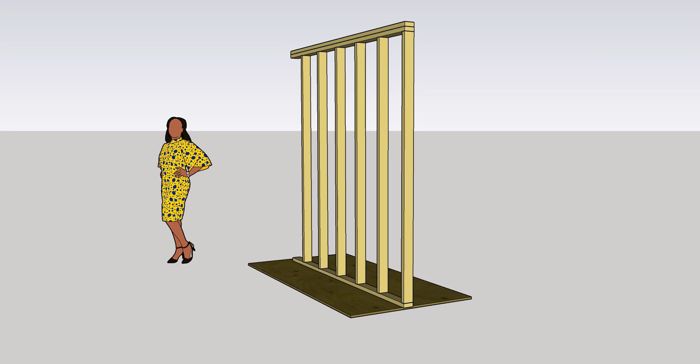So if you remember, the bedroom for the Jones had these dimensions on the floor plan. And in the lecture, I said you need to take off the wall thicknesses because these were going to be center lines. Now the true wall thickness is 4.5 inches. You have a 3.5 inch stud wall, half inch on one side of drywall, half inch on the other side of drywall, and it's 4.5 inches.

For simplification purposes, I said just take off 2 inches. That's going to be good enough. Remember, these are still estimates, and there's always a little bit of slop in the number. You want to be as accurate as possible, but you don't have to go to like the 10th decimal place.

So if we add this distance of the bedroom from this point to this point, it's 13.6 plus 2'6" minus the 2 inches of this wall and the 2 inches of this wall. And that's what we've got here. We've got 13.6 plus 2.6 is 16 foot, minus 2 inches is 15.8, and 15.8 in decimal is 15.67 in feet. Same thing for the other wall.

This one did not go to the outside. Sometimes dimensions will go to the outside, and I said in class we'll take off about 6 inches for that. And again, it's a 2x6 wall. It's got exterior, it's got interior, but in this case we don't have to worry about it because the dimension string stops on the inside, so we don't have to go through that wall. We're good. Remember, for this paint and all these finishes so far, we've only been doing the interior surface.

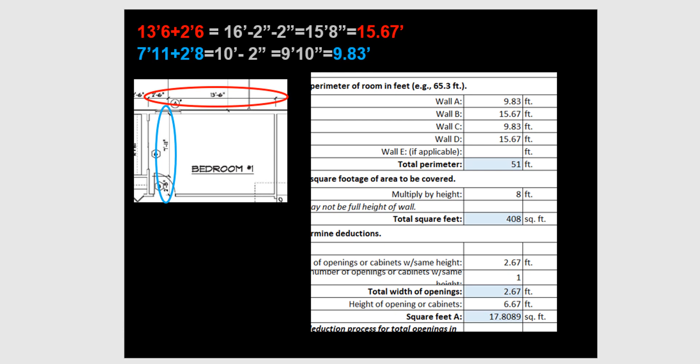So this is 7'11" plus 2'8" equals 10 foot minus the 2 inches, because there is this wall to consider only. And then that comes out to 9.10, which means 9.83 feet. That's the decimal formula. So now we can put that into the worksheet we have.

And the worksheet we have works fine if the ceilings are flat. Bedroom number 1 would be a standard height ceiling of 8 foot. So we have the 4 walls, and we've got the dimension here. I personally think instead of perimeter, we should say lineal feet, and consider it that way too, because it's going to be important later on. Basically, perimeter and linear feet is what we're doing right now anyways. We're trying to get how much wall surface and how high area to go through it.

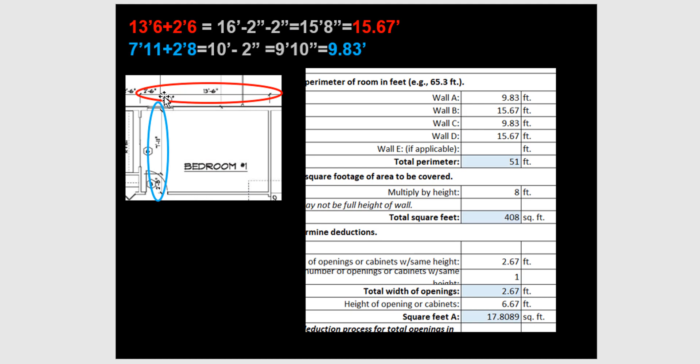So again, what they do in the calculation sheets is they take the width of the opening or the cabinet, multiply it by the number of openings of the cabinet, and then multiply that by the height. Frankly, this could have gone in the other direction — they could have had width of openings, height of openings, and then number of openings. Same notion, just the way that it was written, and it's fine. Same thing for the door: 2.67 is a 2'8" door according to the schedule, so it's 2.67.

One of them, that's the total width, is 2.67 times the height, and that gives me the square feet. The other one is a 6 foot wide bypass door in the closet. There's only one of them, so of course you multiply that. This formula should be the multiplication of the width times the number of them.

Same thing here with them. Actually, once you get these formulas done, you can copy them here and copy them here because the relationship of these numbers to the formula is the same. The height of this is 6.67, that's 6'8", and again that's the calculations. Same thing here, 6'1", 6'8".

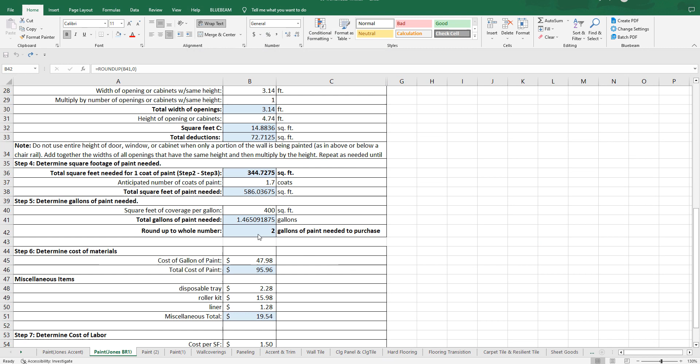We click OK, and the formula should say 2 gallons of paint, which makes sense. That's exactly right. If it says something weird like 6 gallons of paint, they'll say wait a second, we only need 1.4 here, what happened?

So then we go down here and we added a step 6 and a step 7: labor and materials. These are extra materials. We've got paint, what other things do we need to have included in this? Same thing here. So we have the paint, someone's got to put it on the walls.

So the cost of paint, we said, was $47.98 per gallon. We need 2 gallons, so that's what it is. That's the formula, and sure enough that's how you multiply it, right? The 2 gallons times that.

But then I had this in the lecture just for some things to add. You, of course, would have a more detailed list if you needed that. And so this just adds up, again, to whatever this miscellaneous is. So we've got miscellaneous items to add to our total.

And then we talked about this cost per square foot, the labor. And again, that's something that would be given to you or you'd have in your database or whatever based off past experience, what people usually charge for this kind of work. It will depend if it's a sloping wall or not, if they have to get some scaffolding, if it's 3 stories tall, maybe it's the interior of an auditorium or something like that. So there might be some other things to come into play.

But right now we're saying that the person said $1.50 to paint this room per square foot. That's the standard that's typically used for labor, or one of the possible ways to calculate labor for a space. So if I double click in here, that's what they told, and this is the formula that we wanted to use. There's some discussion in class about this formula because they said, why couldn't you just multiply by 2? And that might be the solution to the problem.

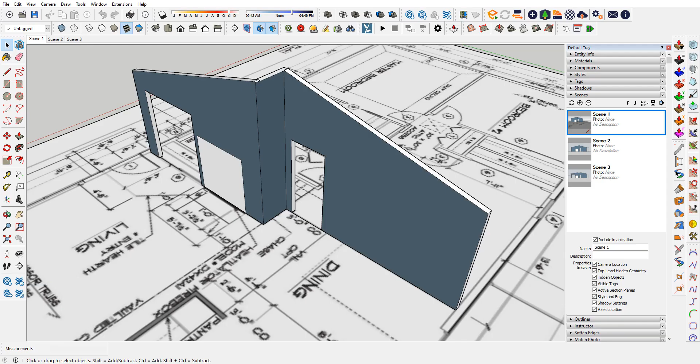When I looked at the wall like this, I was calculating it straight on. Okay, so that's fine, but the problem is we have more than that. We have this wall right here. And again, this is a very common newbie mistake.

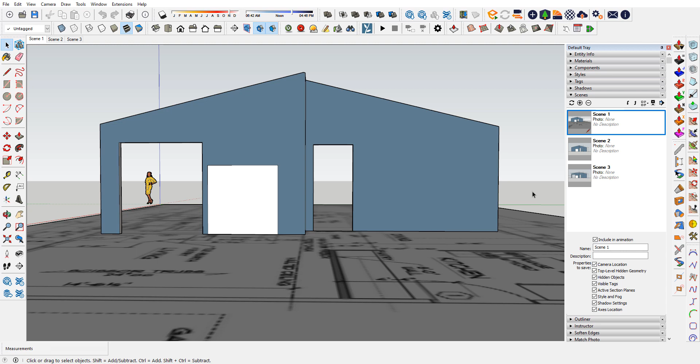I think it came about because I was using the spreadsheets in the book and kind of trying to make it work with numbers and math, and totally forgot about how to handle this kind of stuff. If I was maybe more carefully laying it out, it may have been different.

So let's go back to this then. So basically, we need to have calculations for this wall and this wall. That's different from calculations for this one, because this wall has a variable height here and here. Depending on where I am on the wall, the height changes. But this one's a constant height.

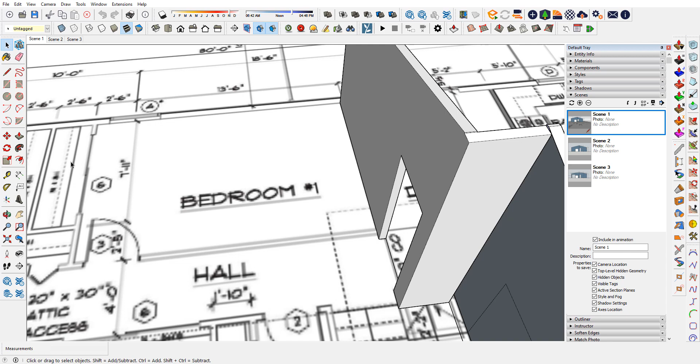All right, so we got to take that into account on these spaces when we have sloping walls. It wasn't the case for bedroom number one. Bedroom number one was very straightforward, flat ceiling, constant height. But this one has variable heights. These are sloping walls. So this one's constant and these are not, and we have to take that into account.

All right, so how are we going to do that? Our worksheet for Jones isn't accurate. We need to have something for not constant heights and the non-constant deducts. In the end, we should have a formula for the total square footage.

Okay, so let's go here. If you can click onto whatever tab you've got your accent, we're going to start working around this. Now in this one here, again, I don't think perimeter is the right word for this. So I'm going to change this to perimeter / lineal feet. We're really talking about lineal feet of wall.

So let's go ahead and do that. And that way, it's perimeter if it's the whole room, but if it's not the whole room, if it's parts of the room, then it'll be lineal feet. Then this cell has been grouped together. You can see up here at the top when you click on it, it says merge and center. Let's take it off merge and center. So we have different classifications here.

All right, and then actually, I'm going to merge and center this one here. So in this one, I'm going to say constant height, will be constant height. All right, so what won't be a constant height?

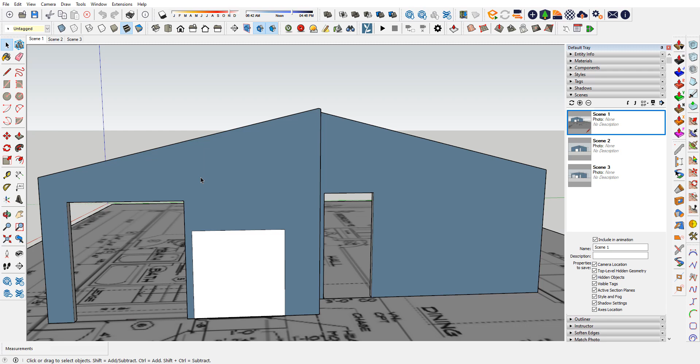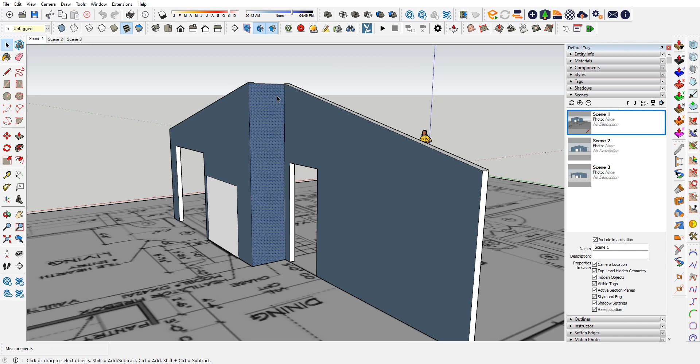Well, going back to the model, in all honesty, none of these are constant height, are they? Let's go back. This wall here is going to be 8 feet. This wall here is going to be 8 feet. So this is not 8 feet. So we've got to take into account that we've got different wall heights depending on where I am on this.

We've got sloping walls, we've got unique wall heights, and then we've got the constant or the standard wall heights. So I'm going to go ahead and make sure that all the border, outside border for that is done. Click on that and click on outside border here.

So I'm going to copy this. I'm going to paste it over here. And I'm going to paste it over here.

This one is going to be sloping, and this one's going to be unique. This will cover all the heights of that space. So constant height will be for the room that's all 8 foot tall.

I might call this standard height. Just standard. That could be a 9-foot ceiling, 10-foot ceiling. What's the standard height of the whole building of that level?

Okay, hopefully that will be good enough to keep going forward with these assignments. But there's also the sloping height and the unique height. Now these formulas are still the same, we just got to change the numbers.

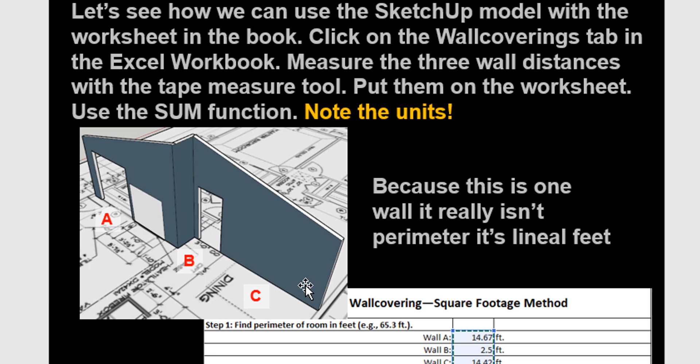So for our Jones, we have no standard height wall in this particular example. All of our walls are unique wall heights or sloping wall heights. So if we label this wall A and this one B and this one C, we can figure things out. It's kind of good to just label all these out.

On this one, we could add more walls. It says E if applicable. We can keep on going. For right now, we have all wall A, B, and C.

Well, what are they going to be here? Let's clear this out as well. Let's clear these out as well. So wall A, B, and C, there are no standard heights.

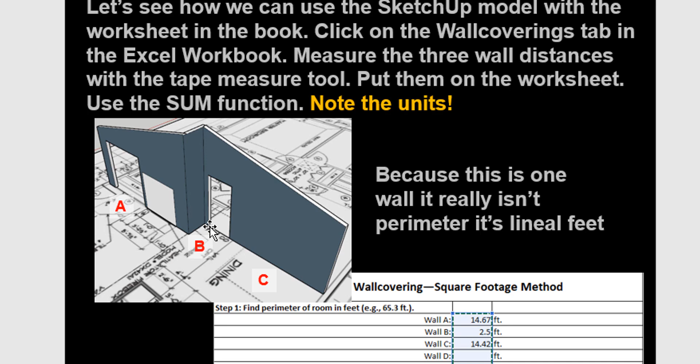A and C, however, we have a distance for them, and they are sloping walls. So A, I'm going to call out as 14.67. And C is 14.42.

And wall B is a unique height. It's not the standard height of the building, so it's 2.5 feet. Yeah, I think you start seeing what we're doing here.

We're going to have different columns. We have a big spreadsheet we can use, with different columns for the different wall heights we encounter. If we only had standard height, like the bedroom, then what we've got is good enough. But we're talking sloping and unique heights.

All right, so let's go now to the next one: find area square foot to be covered. Well, we multiply by the height. In this case there is no 8 foot anything, so I'm going to get rid of that.

I'm going to copy these cells, copy, and paste it here. So for sloping height, we calculated that the average sloping height was 9.83, basically 9 foot 10. I rounded that up a little bit because we're basically taking this sloping and taking half of it, moving it over to the other side automatically. So it's 9.83.

So the sloping height, I'm going to multiply by 9.83. However, the middle wall is basically 11 foot 8, so that will be 11.67. And again, these formulas update, and that's what we want.

And the answer is yes. We've got this 3-foot door, and we've got this 6-foot door. So we've got these are the deducts, the deduct A. We got a 3-foot cased opening, there's one of them, and I think it's supposed to be 6'8", so 6.67 tall.

We've got a 6-foot door, and there's one of those, and they are also 6.67 tall. There's nothing else here. Then this last one is the deduct, basically, of the fireplace, which we said was 5 feet by 5 feet. We have a 5 foot by 5 foot.

That's going to be tile or brick or whatever. It's going to be something other than the wall that gets painted. This is all happening on the sloping walls, so that looks good. And so this deduct is still the C, B, and A elements. Right? You add them together, that's all the deducts we have.

For the unique height, let's move over a little bit here. For the unique height, well, there's nothing. There's nothing there, so there's nothing on that little wall portion. It's just a solid piece of wall.

Nothing. All right, so we've got the areas that we need now. We've got the area of the standard height, which in this case is 0. The area of the sloping height, which in this case is 85.03 of the total, and then the unique height is 0 because there's nothing else. There's no openings there, but they're all accounted for.